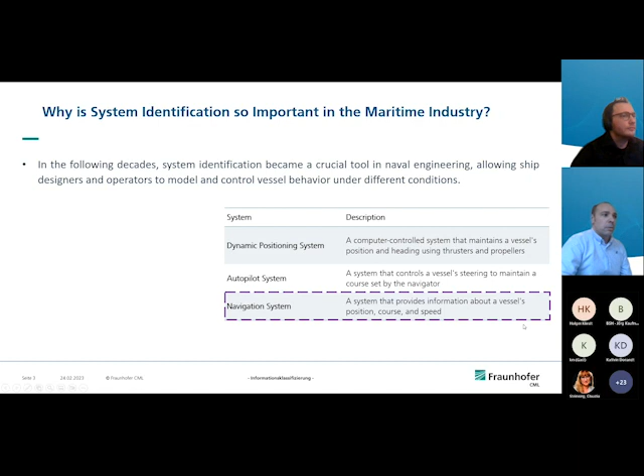Nowadays, system identification is not really a topic that is closed, but open. And we can say that with the appearance of artificial intelligence and machine learning algorithms, system identification is going to see a high improvement in its performance. And especially in the ship, we consider that artificial intelligence is going to help us to have a better understanding about the dynamics of the ship, which will allow us to have a better understanding about the maneuvers in different states. This means we are going to get not only better trajectories, but also a reduction of the fuel consumption of the ship and reductions of the CO2 emissions due to carrying out efficient and optimal maneuvers.

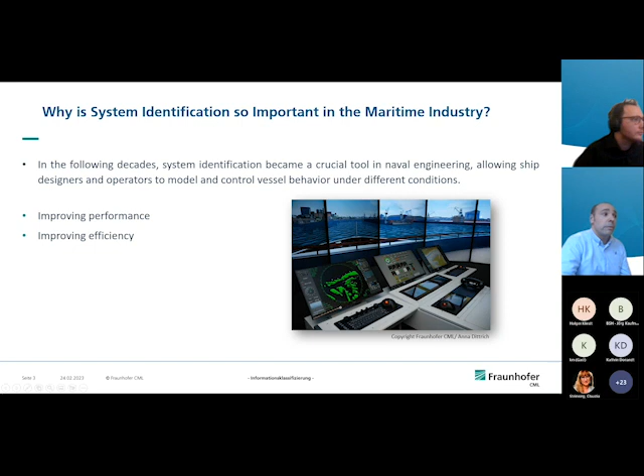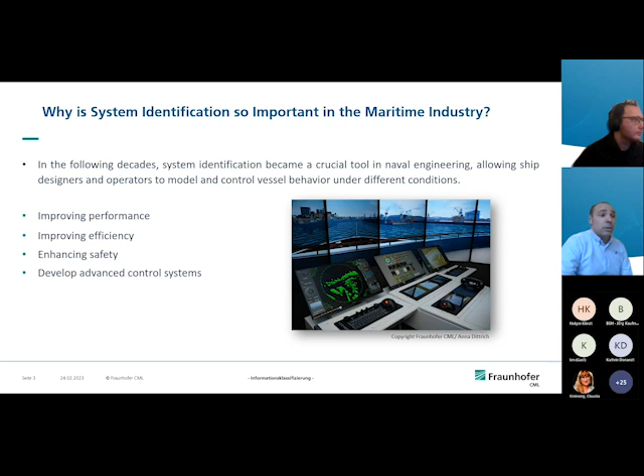And with these two performance efficiencies, we are also enhancing safety, because we can predict maneuvers under different scenarios to know the real situation and obtain the best maneuver in a safe way. And also, machine learning implemented in system identification allows us to design new advanced control systems, for example, autopilots, and for prediction of the parameters.

Well, let me talk a bit about the current state of system identification for ships and submarines. We will say that system identification in all areas is basically determination of the model structure and parameter prediction. But I will say that determination of model structure in the shipping industry is not, at this moment in research, our main challenge. Because from the point of view of the simulation, the mathematical models that we implement for computation of the system outputs through numerical integration are very well known and very well studied.

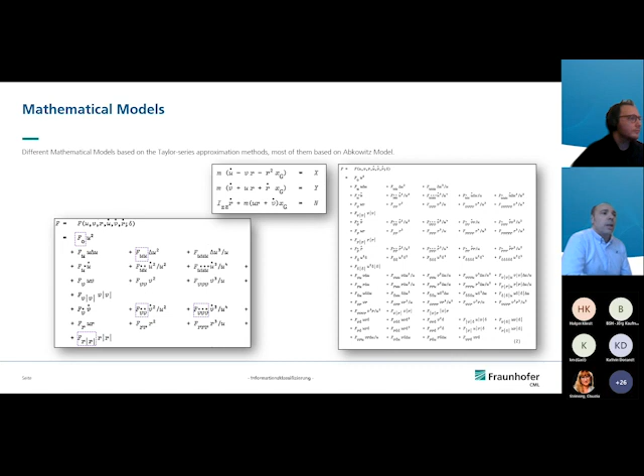This means that the mathematical model can be divided into a structural part and a parameter part. The structural part, as I said, is very well known. The challenge for us nowadays is the identification of the parameters, because they really provide us the hydrodynamic behavior of the vehicles. As I say, the quantification of the parameters is very important for us in our research. And here is a small example to see the influence of the hydrodynamic forces when the ship is in different conditions.

This shows the strong impact that the hydrodynamic force has on the ship. The thing is, for us, it's important to know that nowadays in the shipping industry we manage a set of parameters. The navigation system only has a set of parameters for deep water conditions, and when ships move to shallow water conditions, they use correction factors that are implemented.

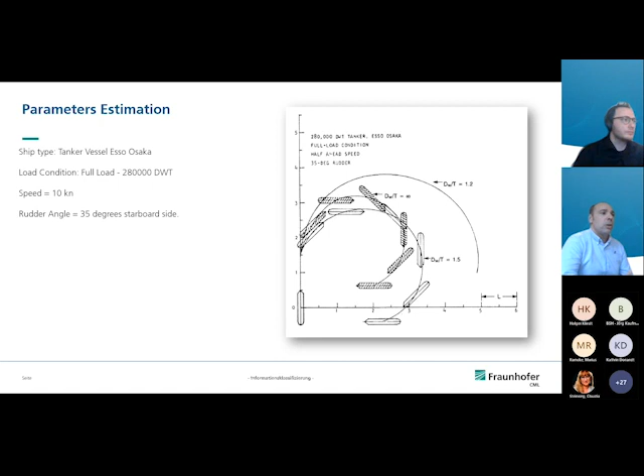With the help of artificial intelligence and using the current methods, we consider that we could be able to predict hydrodynamic coefficients not only for one set, but for many sets for the different conditions the ship is involved in. Here, I would like to show you, according to the International Towing Tank Conference, the main methodology that we implement to get predictions of the parameters.

One of the most important is experimental methods. For example, here in Hamburg, we have one of the most important towing tank centers, the HSVA. In this center, we carry out analysis, but unfortunately, they are very expensive and very time-consuming. Sometimes shipping companies are reluctant to use this analysis, especially because it is very expensive and takes a lot of time.

But I have to say that now towing tanks use not only experimental methods but also computational fluid dynamics. These numerical methods produce very good results, and this reduces the time we need for experiments. But unfortunately, computational fluid dynamics methods at this moment need to solve partial differential equations for the mathematical model. What does this mean? That the computation is very expensive, and to carry out some simulations, we may need to wait 20 or more days to get results.

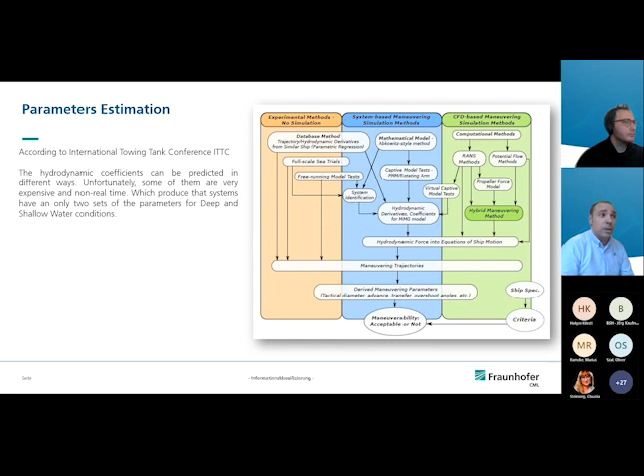What does this mean? That system identification implemented with this mathematical model is not the best option for real-time tools. In this case, the other option is the system-based maneuver simulation method. That is mainly what we are implementing at the Fraunhofer Institute for research in system identification. What we are doing is collecting data from the towing tank and from CFD, training the algorithms, and producing predictions of the parameters. But as we will see now, we can also use real data to predict these hydrodynamic coefficients.

Let me continue. As I said before, the implementation of machine learning, in comparison with the conventional algorithms that we use nowadays in system identification, is producing better results. The first and most important step in machine learning implementation is gathering the data. As you can see, the data we can get is from AIS data, gyroscopes from the ships, from the towing tanks, and, as I said before, from computational fluid dynamics.

Relating to computational fluid dynamics, nowadays the implementation of artificial intelligence is serving to reduce the number of tests that we need to carry out in CFD. With a small number of tests, we can get the data provided by them, train our algorithms, and make predictions within minutes after training. This means that for the future, CFD looks like, of the three, one of the most important tools to gather data, because the uncertainty nowadays is less than ever, and this can be very useful for training the algorithms without the necessity to use real data.

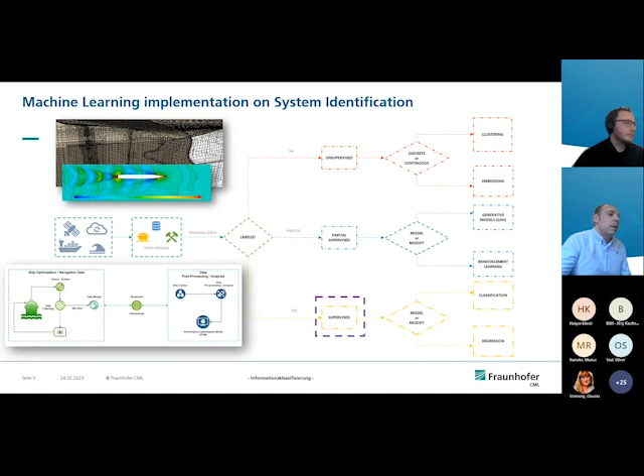But I will say that at this moment at Fraunhofer, we are focused on algorithms that don't require too much data for training. Nowadays we are getting good results using not too much data, maybe 100 or 200 kilobyte files of data, and this is enough for training our algorithms and getting good predictions. I'll also mention that the algorithms we are working with are in supervised learning. This means that we have labeled data and we are using regression to get these parameters.

And here, to conclude this presentation, I would like to show you some of the results. Unfortunately, reality and tests are not always like this, that we get this good result. Unfortunately, we have to face nowadays some problems with the algorithms, especially because the algorithm has to provide a solution not only from the mathematical point of view, but also from the point of view of the physics, to have a good understanding about the performance of the ship.

But sometimes when we train our algorithms and do predictions, in some cases we saw that the parameters produced the expected output in comparison with the original one, but the parameter has different magnitude and different sign. This means that the algorithm is providing a correct mathematical answer, but not a correct physical answer. The algorithm has to fulfill both requirements.

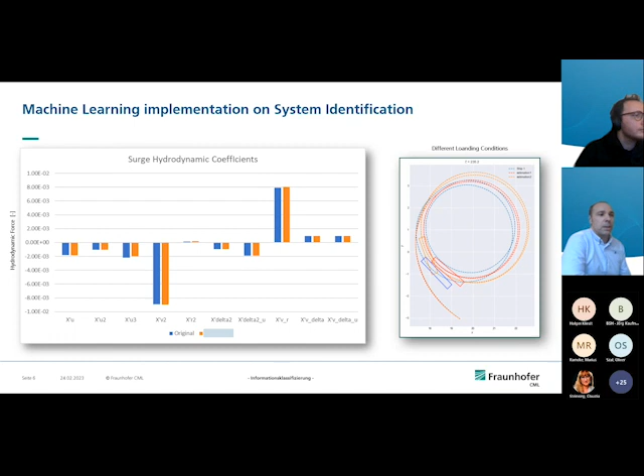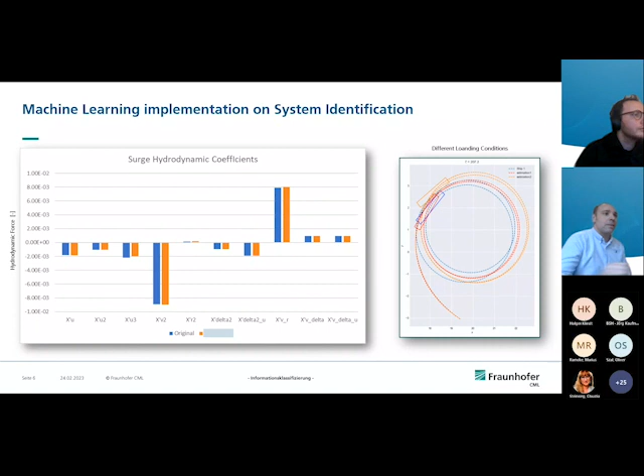If we can predict in real time, captains in the future can have a navigation tool that helps them decide in real time which is the optimum maneuver. This facilitates not only performance, but also efficiency and safety. Well, I hope you consider this interesting, and I think I finished my presentation.